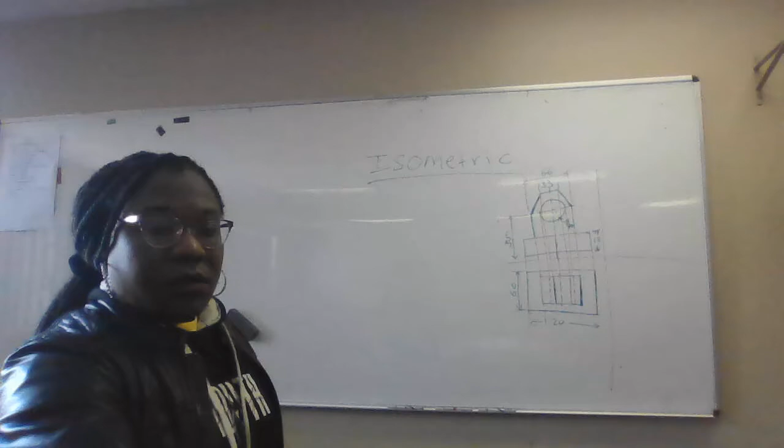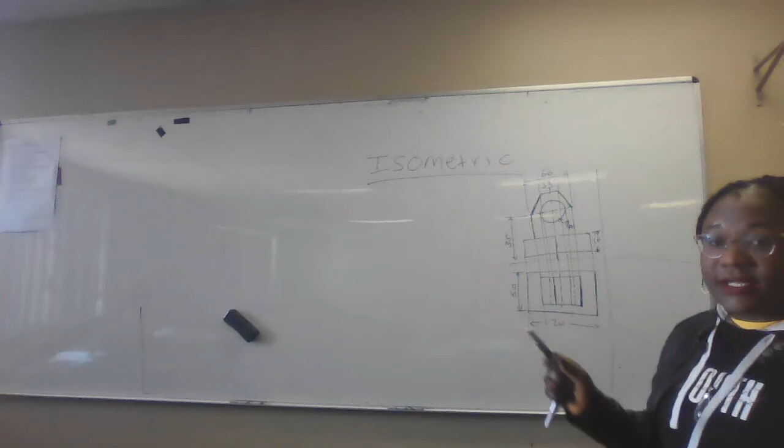Okay guys, isometric drawings. I'm going to introduce this briefly and we'll continue next week on how to draw isometric drawings. We work with three-dimensional objects, and the examiner gives you 2D drawings, from which you create a 3D model, which we call an isometric drawing. So how are you going to approach a question like this?

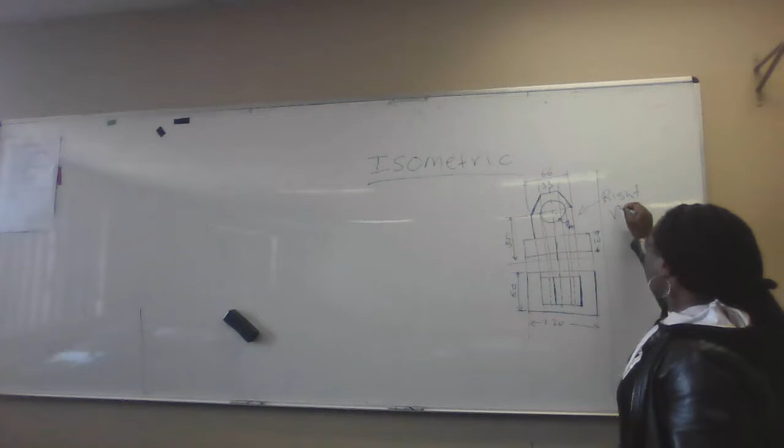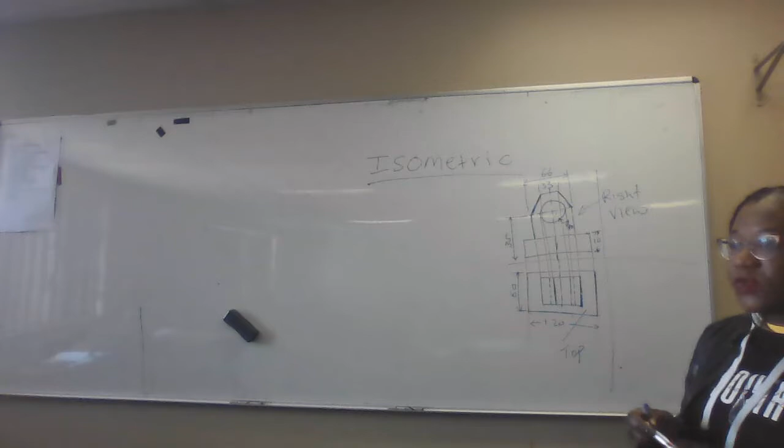If I tell you that this is in first angle projection, you know that this is a right view, and this is a top view. From this, you must be able to create a three-dimensional image. What you do first is look at the total length of this drawing, the total width, and the total height.

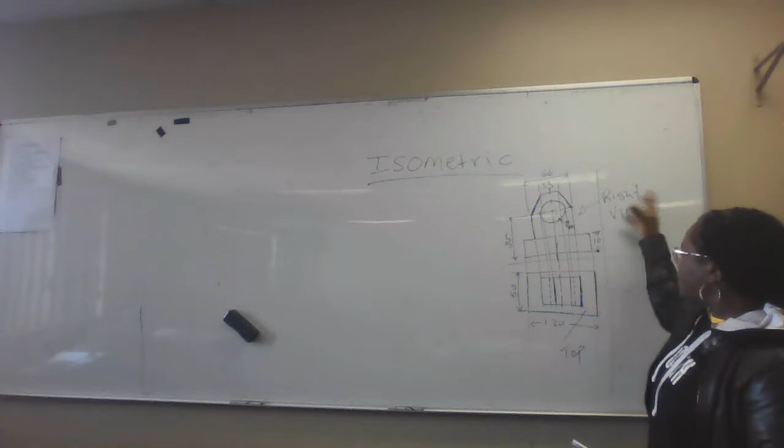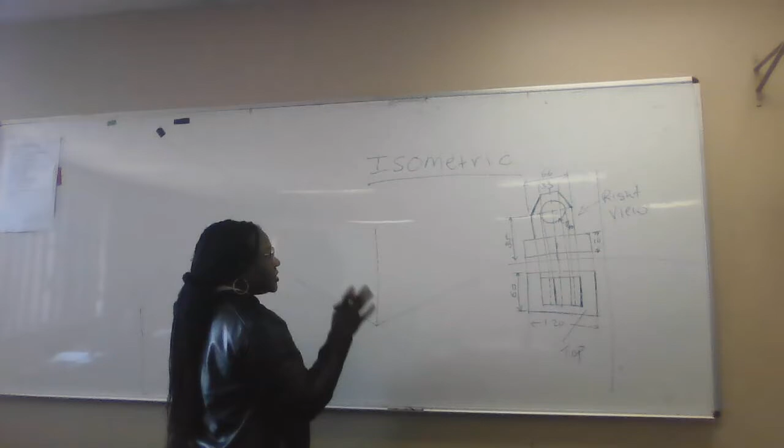So the length is 120, which is also the distance from here to here on the front, your right view. The first thing you must do is create a box. I'll come to the box, but for this type of isometric drawing, we first create an isometric scale.

How do we do an isometric scale? First draw a 45 degree line. This is 45 degrees. Then another line at 30 degrees. This is at 30 degrees, and this one is at 45 degrees.

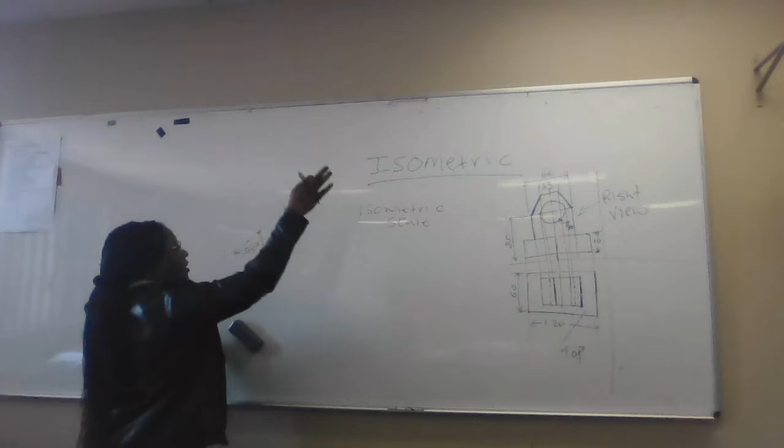We work with an isometric scale. On the 45 degree line, you're going to mark your divisions, 10, 20, 30, 40, 50, 60, all the way. The total length, the maximum length, is 120, so you're going to go all the way up to 120.

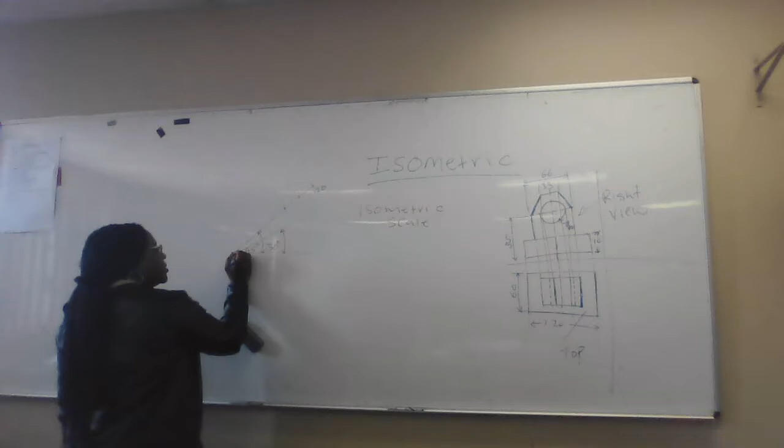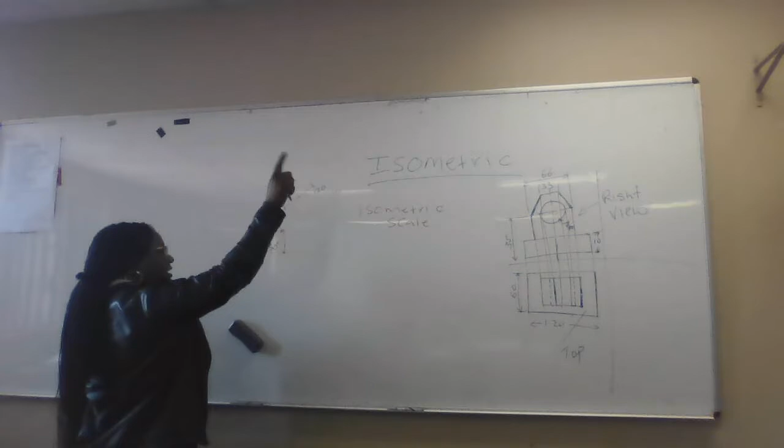The first division here must have 10 subdivisions: 1, 2, 3, 4, 5, 6, 7, 8, 9, 10 millimeters. So this is 10 millimeters. Then 20, 30, 40, 50, 60, 70, 80, 90, 100, 110, 120. You're going to have a length of 120.

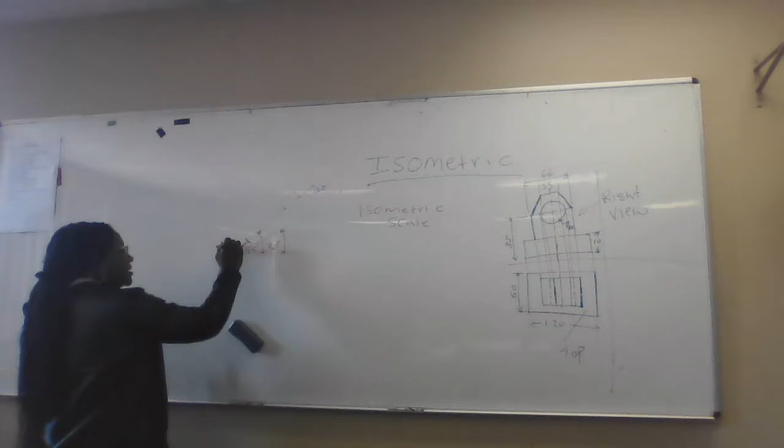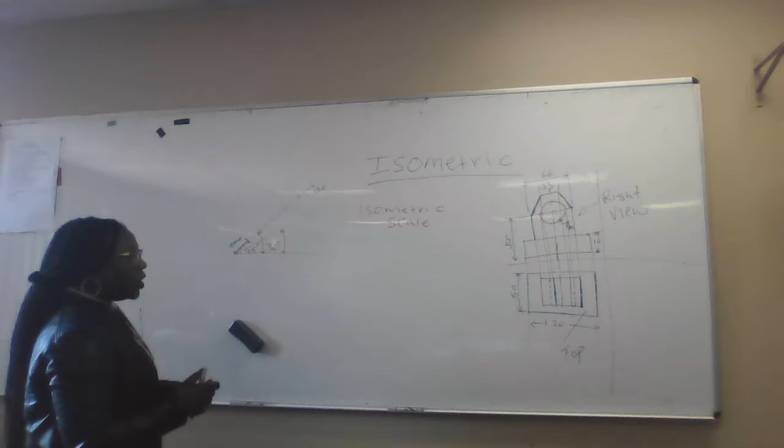The first subdivision is 10 millimeters, but with small millimeters, 1 millimeter each. Why do we do that? Because every block, even the box I'm going to create, which I call the isometric block, is going to be within 120 length, 60 width, and a total height, which is going to be 35 plus the distance going up.

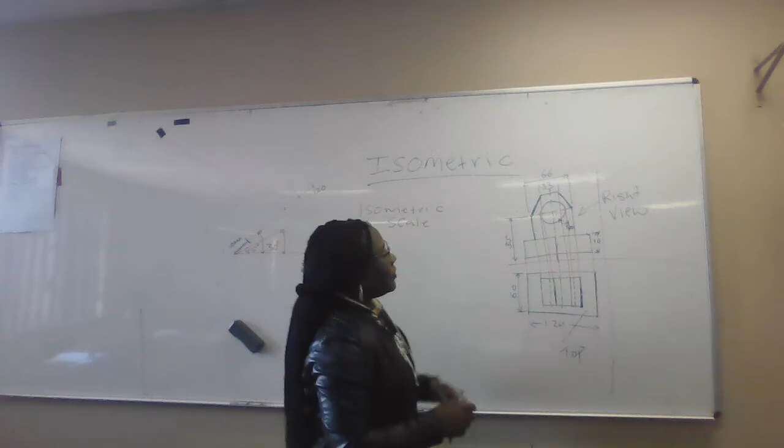In the question, that distance was given, and because it's a hexagon, we say the distance from here to here is the diameter, which is 66. So the size of 33 is the side length, so even here you are going to get the 33. That distance you add together, it's a radius, and the side length of the hexagon is the radius of the circle it is in.

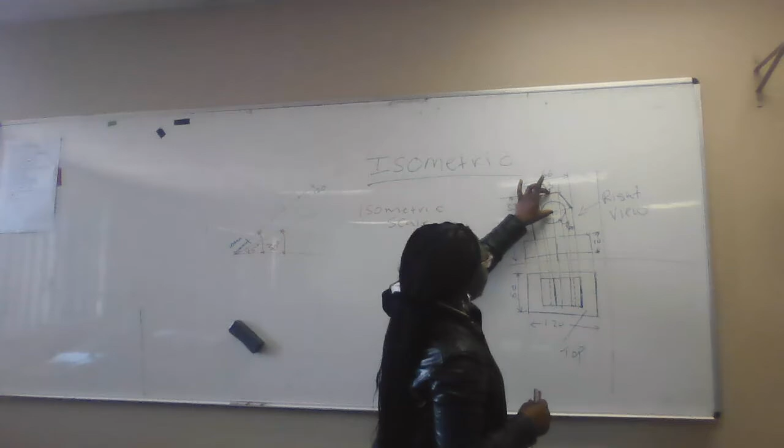So this is 33 plus 35. Then to create an isometric box, we do this first: at 30 degrees, using a 30 degree set square. All your horizontal lines will be slanting at 30 degrees, all lines going here or there at 30 degrees, while the vertical lines remain at 90 degrees.

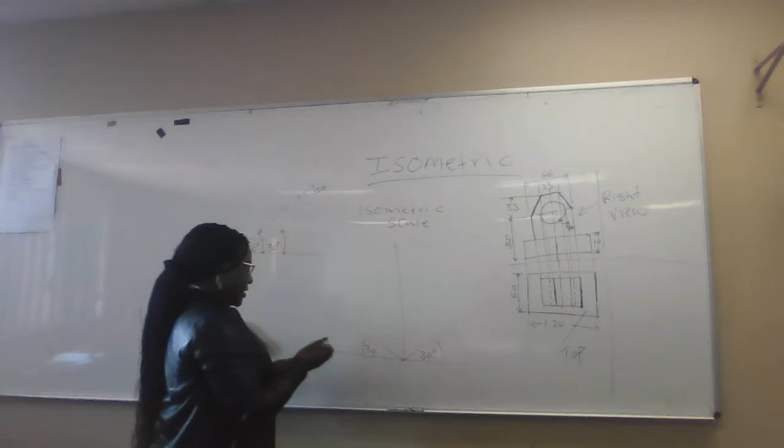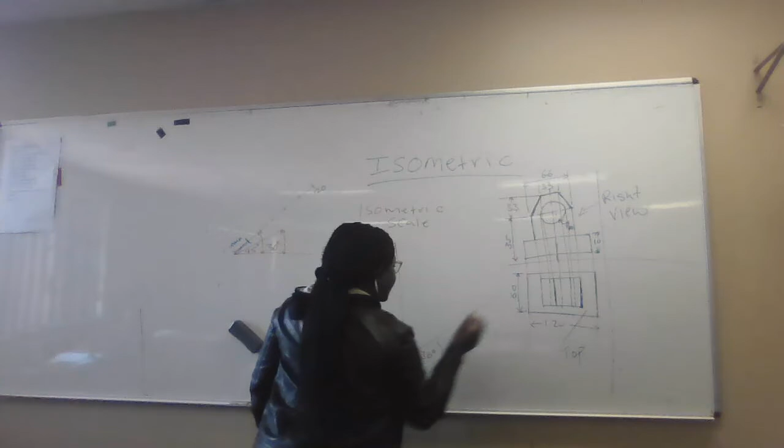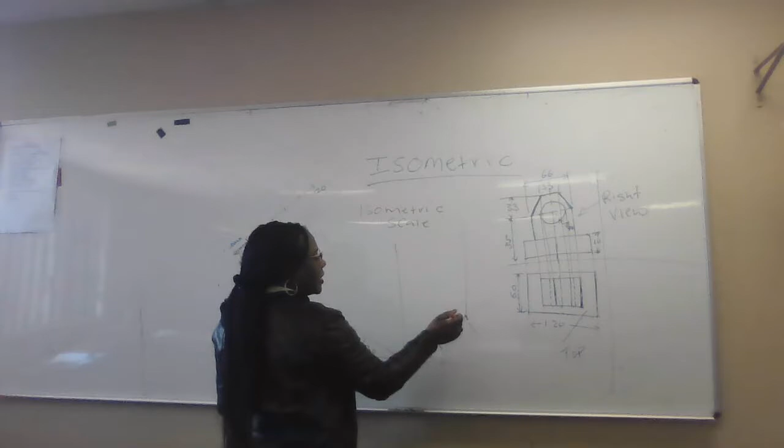Because it's in first angle projection, and this is a right view, a view from that side, this 120 length, the same 120 there, must be marked from here to there. Make sure that is 120 from here to here. When you get there, you go up by the height, which is 35 plus 33, that is 68. You measure up to 68, the total height of the object.

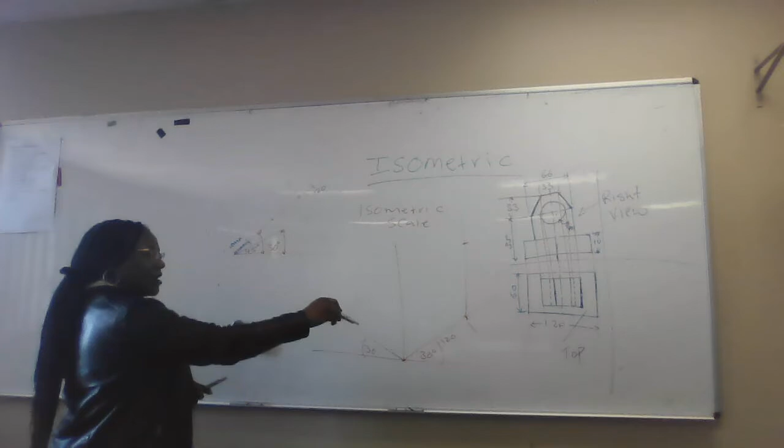When you are there, make sure that this 120 you mark here must be taken from the isometric scale. How do we take that? Because we are not going to draw one-to-one here, they say by use of an isometric scale.

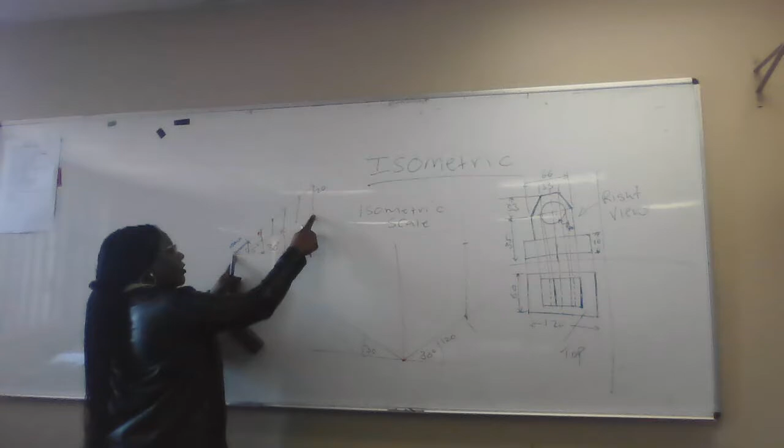So once you create those divisions, you bring them vertically down to the 30 degree line, meaning the 10 straight down, this one down, this one down, vertically down. If I'm looking for 120, I will measure from here on the 30 degree line, and that is the 120 there, not on the 45 degrees. Then the small divisions, also bring them down to 30 degrees, like that.

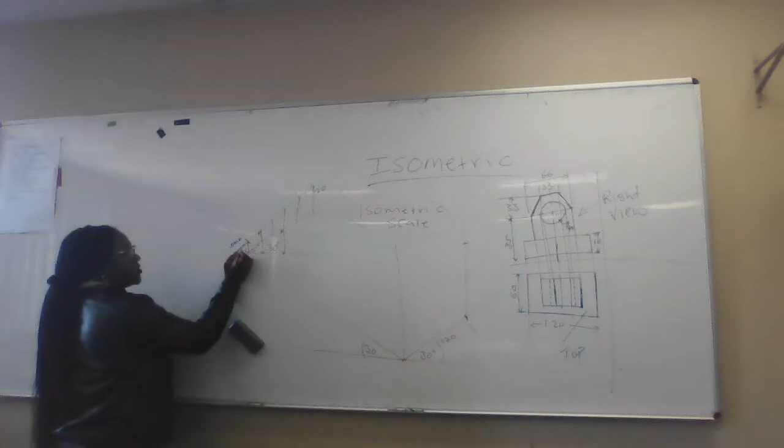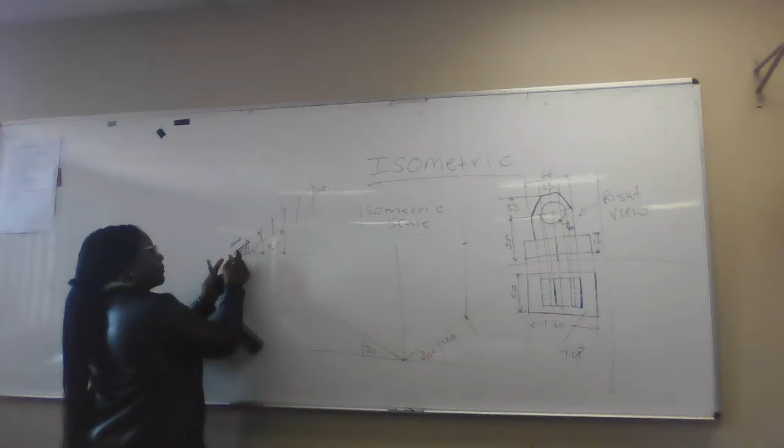If I'm looking for maybe 58, I'm going to count 10, 20, 30, 40, 50, then get the 8 from the small divisions, then I get 58, and mark it there. So the 120 that I've marked from here to here, it is from there to there, if we mark 10, 10, 10, 10 up to 120.

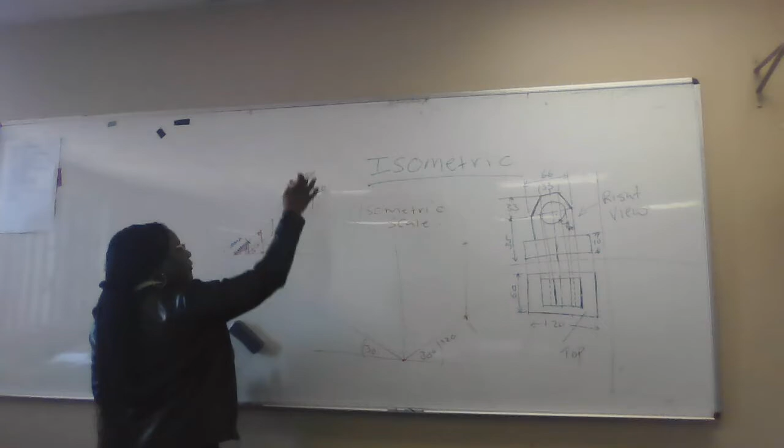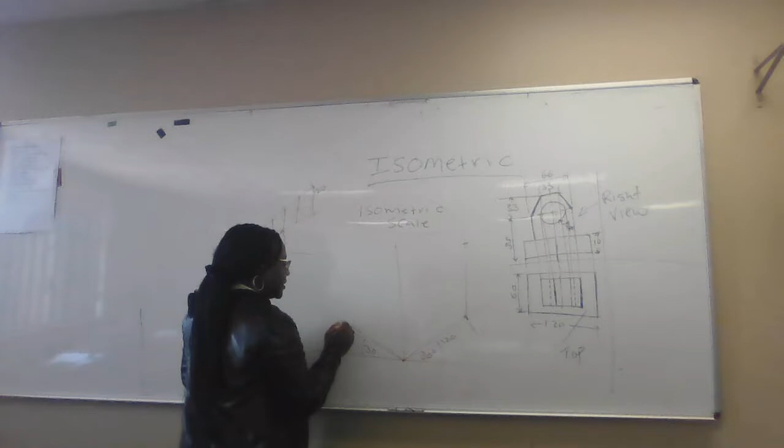Then the width will be the left view, which is this side. It's a top view, the left will be there, so the width is 60. You mark 60 degrees, 60 millimeters, so this is 60. Also, you go up.

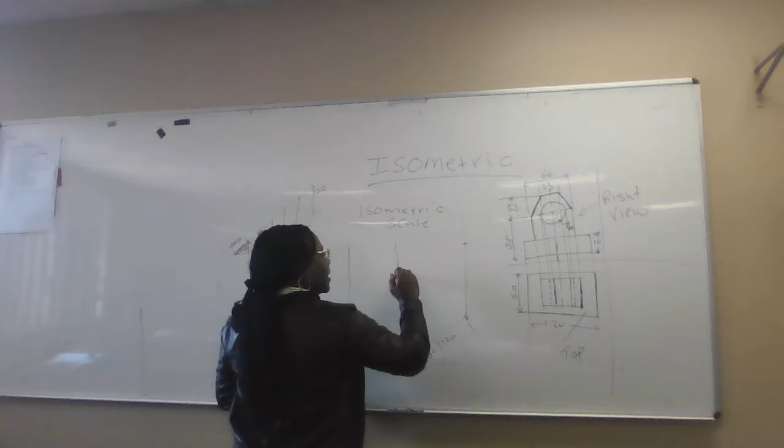Then when you go up, you are going to mark the total length of 68. Then from there to there, obviously it's going to go that way, so let's say 68 is ending here. This is 68, this is 68, this is going to be 68, from here at 30 degrees going that side.

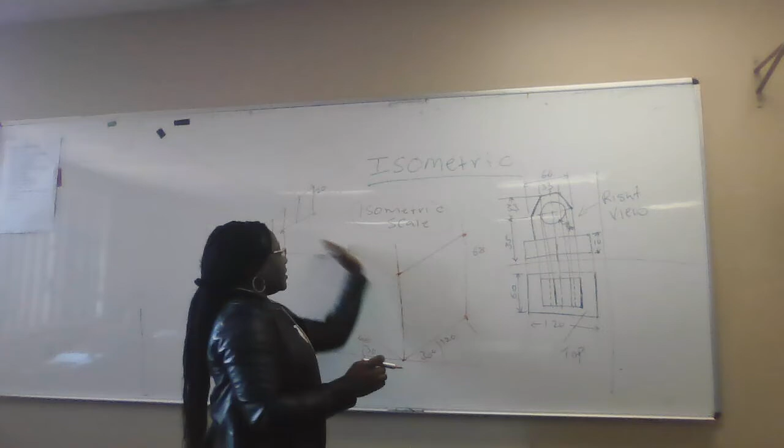You are here. This is also 60. And then the next point is from here, 60 degrees, 30 degrees going to the right. And then from there, 30 degrees going that side. That is the box that I said you are going to create.

So from here to here is 60, because that is 60 millimeters we got. Even from there to there is 60. Then from here, you can go inside with a dashed line, because it's inside the box, at 30 degrees.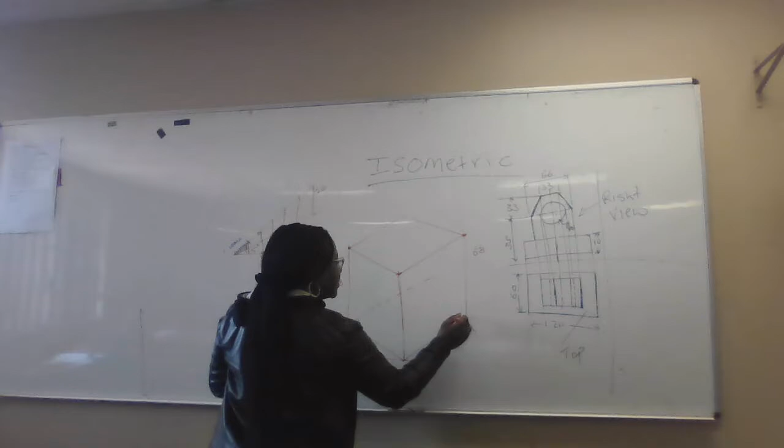And from there, 30 degrees, you go inside. From there, 30 degrees, 90 degrees down. So I'm going to create this from inside.

That is the box. So meaning that you have to create that shape within this box, not less than this or more than that. We went with the maximum distances given, and now we need to create the front view, because it's an important view, which is your right view from here.

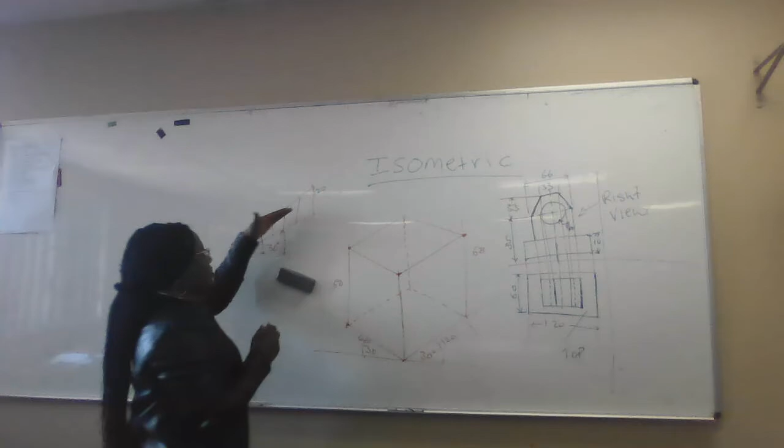Start creating the box first. How much is this? 10 by 120. 120 is already there. But if you are looking for the vertical distances, don't use the isometric scale. Just measure on your ruler on 1 to 1.

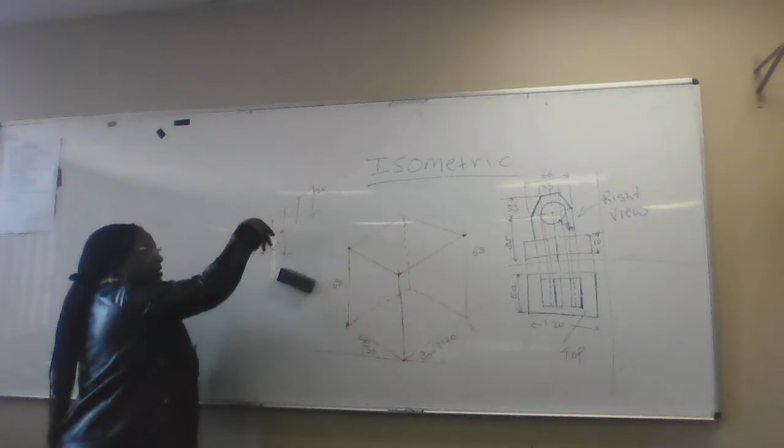But only for the horizontal lines going that way, you use the isometric scale, and on the 30 degrees line. That's why I brought them vertically down, 90 degrees down. Okay, so I'm looking for 10. I'll come mark 10 here.

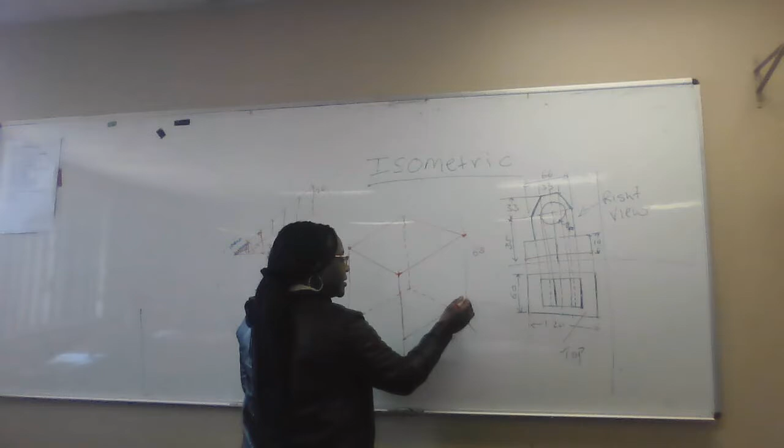Once I mark 10, I'm going to use blue, like that. Already once I draw 30 degrees, I know that that is 10. So the shape that you have just formed, make sure you make it light, because it's not the final drawing.

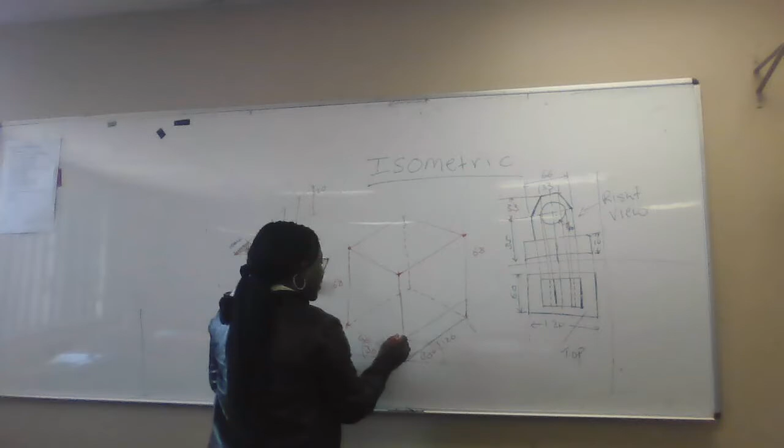That's the face. On here, from each and every point, you're going to go that side. Why? Because that is the width. It's a solid line. Then you take it that side, then you close it here.

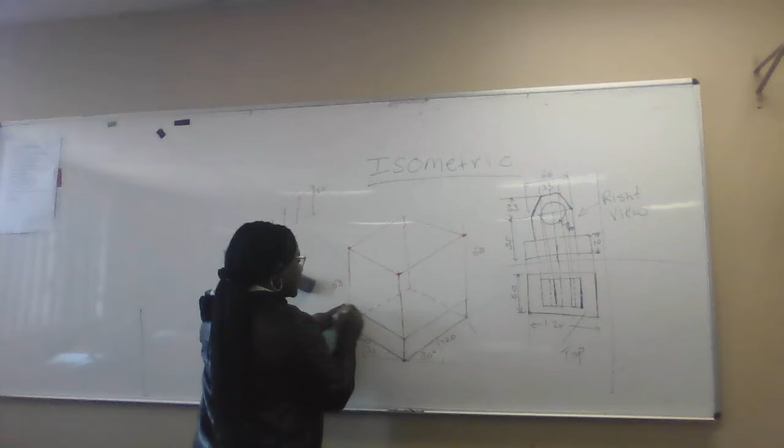This is also 10. So that is the block on the other side. Okay? Then at that point, because here you are going that side, even here you have to go that side at 30 degrees. Then from there you have to go 30 degrees to that side.

And where the two meet, that will be the point, and that is this one in hidden line that I put there. But we don't show in hidden lines. So where they meet, you make a base.

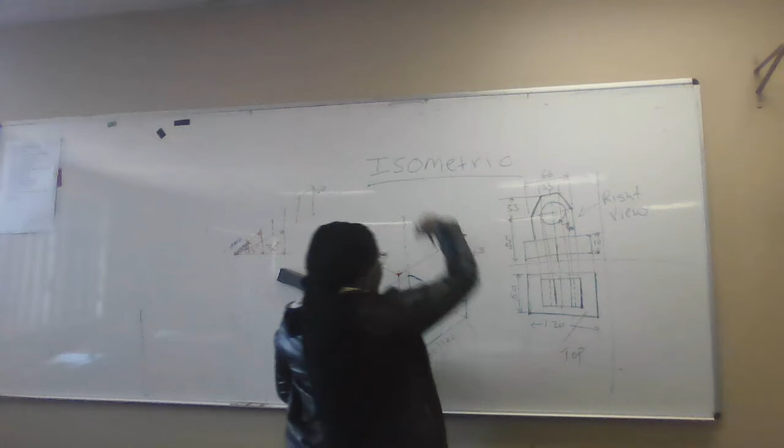And already the base that I've created is this base you can see from the top view. When you stand on top, you will see that base. So it will be solid, you outline.

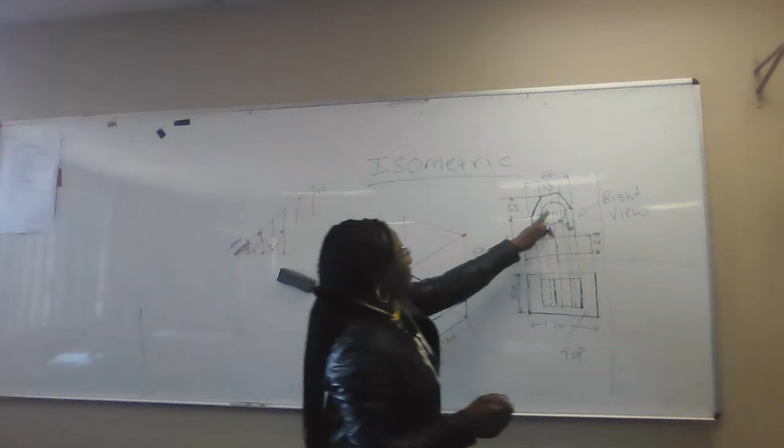Okay. After that, you are going to look at another shape. On top of this, there is this piece here. But from the front view, it's 66. So you need halfway of the front view.

Let's say in the center here, half of 120 and half of 120. You do a center line at 30 degrees. Okay? Then you measure half of 66, half of 66.

I want to mark these 2 points. So half of 66, let's say it's here, and another one here. Then at that point, I'm going to draw 30 degrees line going that way. Even there, 30 degrees line going that way. In construction line, all the red lines are going to be in construction lines.

And then it's got a height of how much. You can see that it's got a height going up. You can go up until here. Let's make up until there.

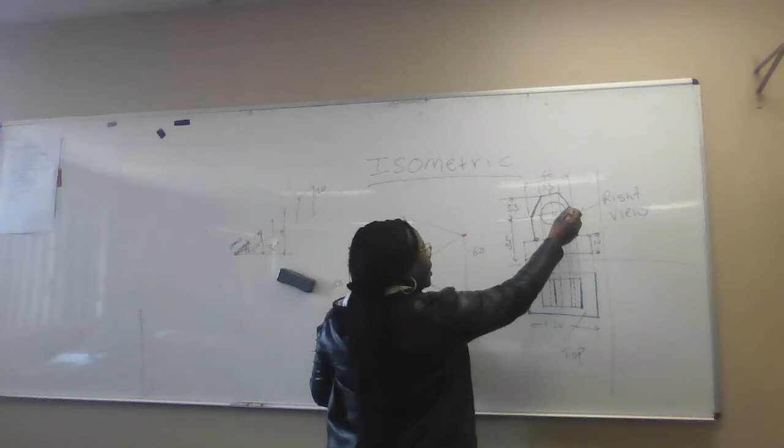So from each and every point, you need to go up. Okay? Then from there, you go up. From there, you go up. And from that corner, where the two are meeting.

But you need to know the width. It's not starting on the ends. Let me not start on the ends.

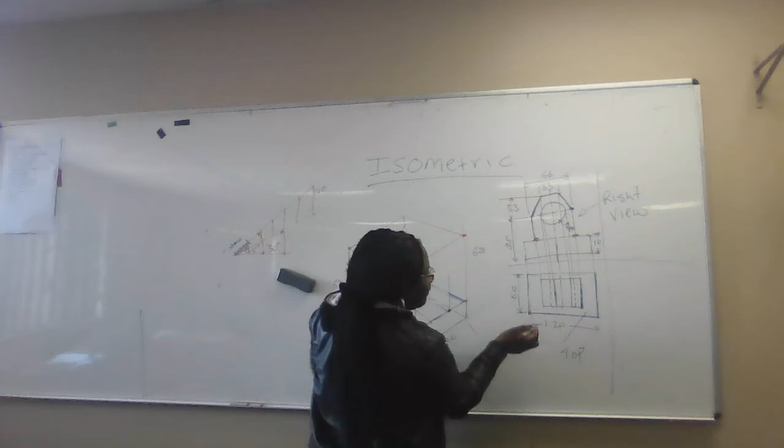When we look from the width, this piece here, it is this side, 50. They gave 50 millimeters, I didn't write, it's 50.

So if it's 50, you're going inside by 5 and inside by 5, because this is 60. Then if you go 5 plus 5 is 10. 60 minus the 10, then you go inside like that, construction line.

And where they are meeting, you can see the first line that we did, where it was meeting, which is this one here. When you go with it at 30 degrees, where it meets that one is here, and where it meets that one is there. And then this one going at 30, it's meeting here, and it's meeting the other one there.

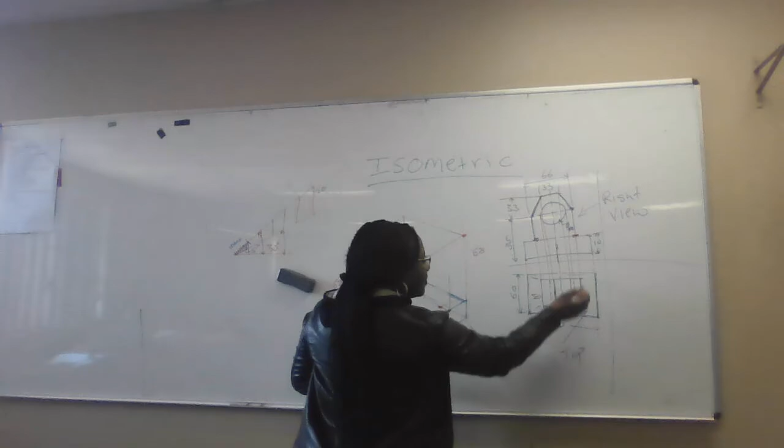I've just created the base of that shape, which is this shape here. Okay, now you can go up. By how much? We can say 35 minus 10, that is the height. You go 25 up, not this center, this is the box, you leave it there. You go 25 up, and then you come here, 25 up. Then this one you have to close, okay?

Let's reduce it a little bit. So let's say this is my 25. Then here, that is my 25. Then there I'll go inside, and this one 30 degrees until it meets with the other one there. I think you can see the box that I've created.

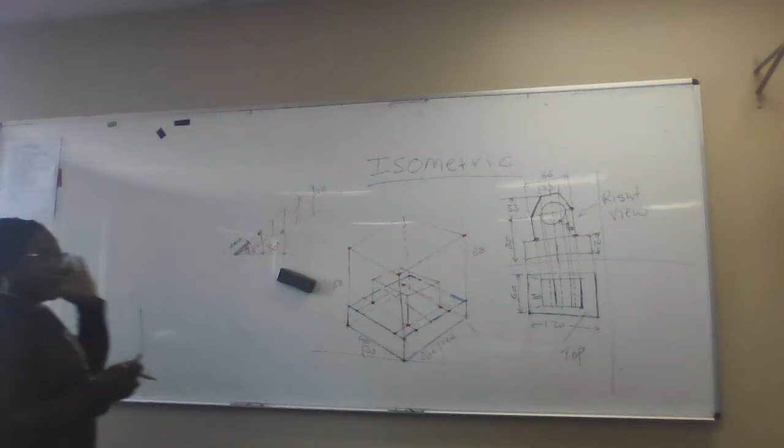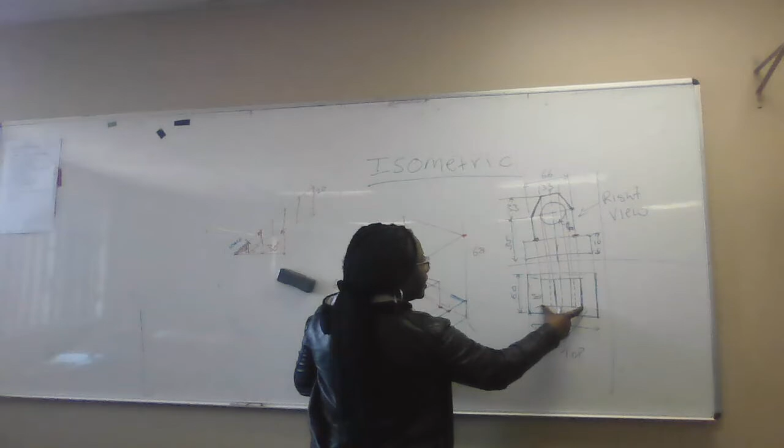So from the side view, which is this side, on the width, you see 50. There is the 50 here. From the front, we see this one, which is this distance here, which is 66. And the height, I measured from there to there.

Now I'm on the top. Then what is happening on the top, you have to create the hexagon shape. And that hexagon shape is starting on that face. So if you know how to do the hexagon, come with the center line from there, all the way to the half, I think it's the half of the box. It's only that this one is not going half.

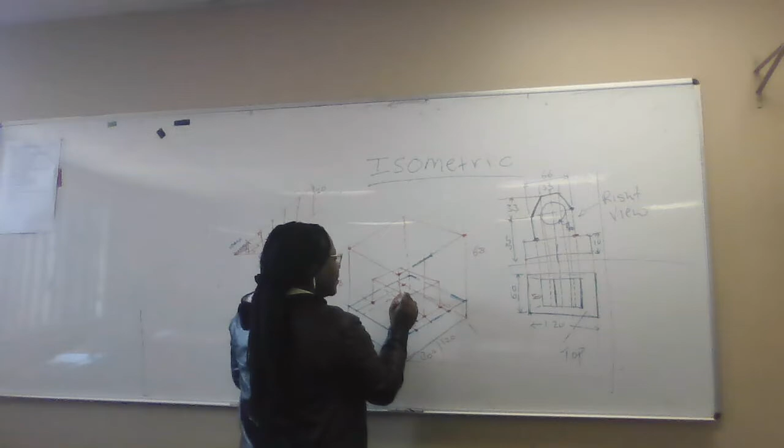Something like that, okay? Then from that shape, because that is the maximum height, you measure half of 33, and half of 33. So let's say 33 is here, and half of 33 somewhere here. This space that I'm highlighting here, it's on the face here, and it's the one that is coming to connect here. You can see that one is connecting there.

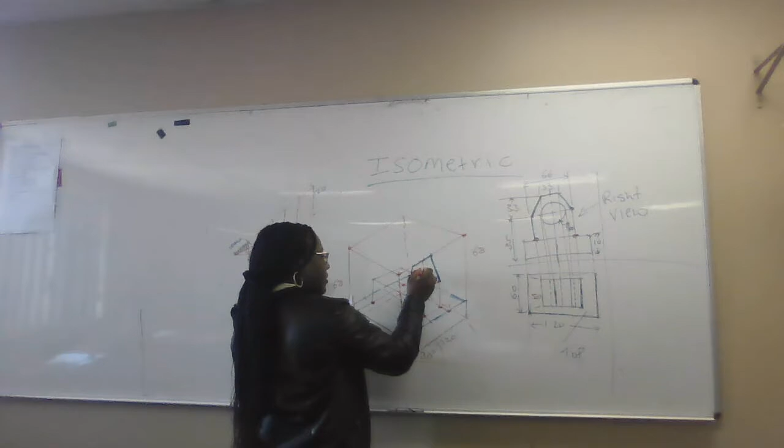So you just connect this one here, and you connect the other one on this end. So this is our center line. Then once you do that, you are going to take your lines to, which is also happening at the back. If you take this line 30 degrees to the back, 30 degrees to the back, it's going to be like that.

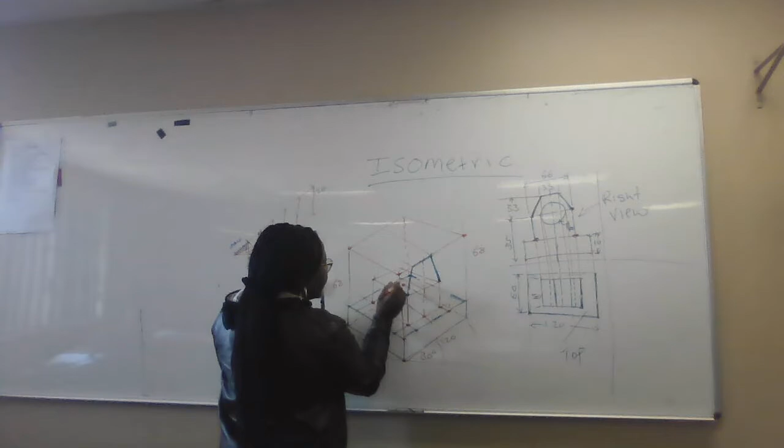Then you need to make sure that at that point here, you are going to go straight the way we came here to join with those two pieces. I'm going to go with a straight line in the midpoint here. I'll go with a 30 degrees line to the half of the box at the back, like the way it was here, okay? Then I can take this center line that way, okay?

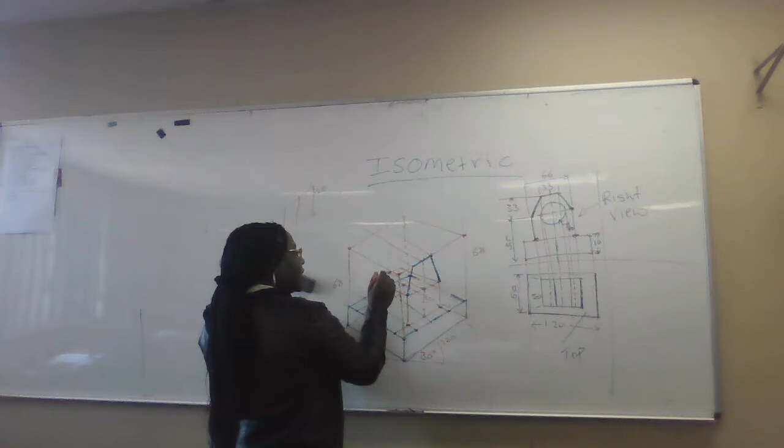Then from there, I can go up this point here, or else you need to make sure that you don't exceed that box from the top. So how am I going to get that point? I need to just go up here by the length, which is 50. So from here, you measure 50 going inside. Maybe the 50 ends here. That way you can go 50, maybe it ends there. And once it ends there, it's supposed to come and connect here.

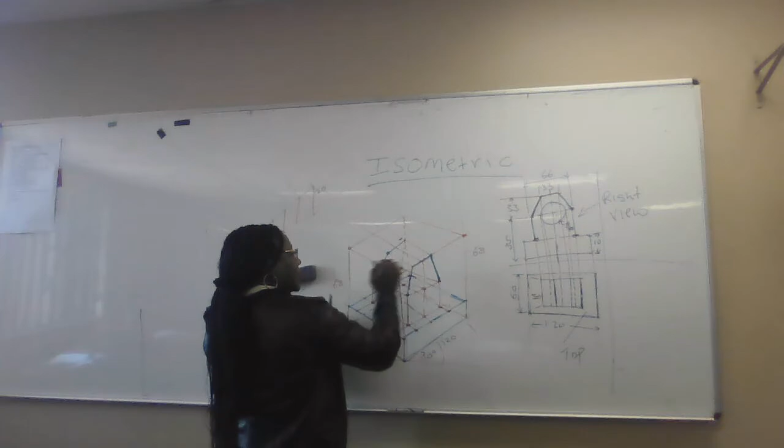And from there, 30 degrees, the way we went here, it's gonna go 30 degrees here. Then this one is going to join there, but it's at the back. You are not going to see how this one joins at the back there. But this should be solid. This should be solid. And this should be solid.

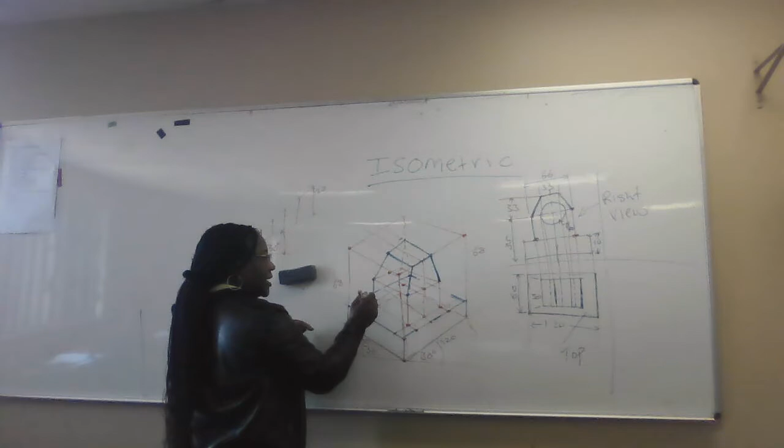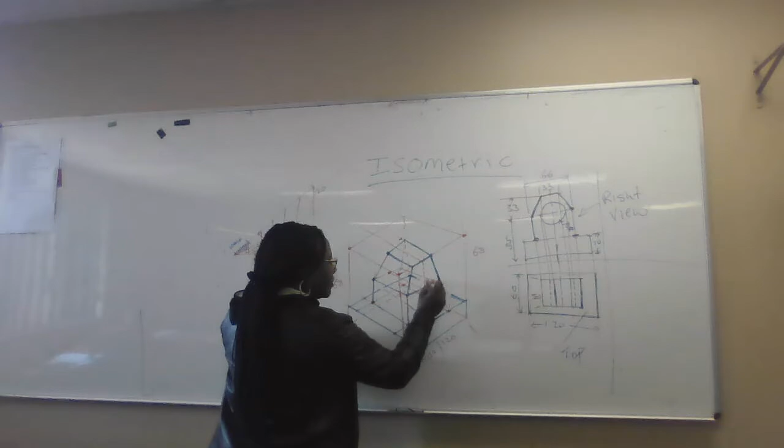And then you start outlining those edges. You can see. This one, it's a box. At the bottom, you outline, you outline. Why am I outlining? Oh, there's no outline here. So we don't need to put an outline here. Okay? It's just one thing. It's going to be one shape.

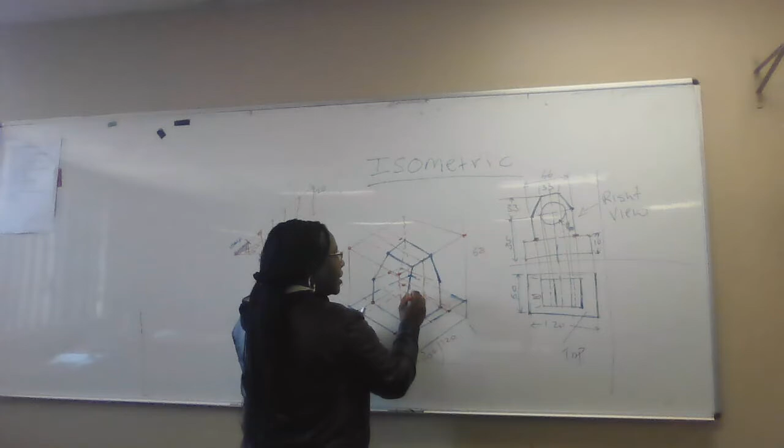I see there is a circle here. When we come to the circle, I'm going to explain how we do the isometric circle. And the circle is just lying in here, on the center. Yeah, there is a circle there. If they say there is a circle, you are supposed to work with what we call isometric circles.

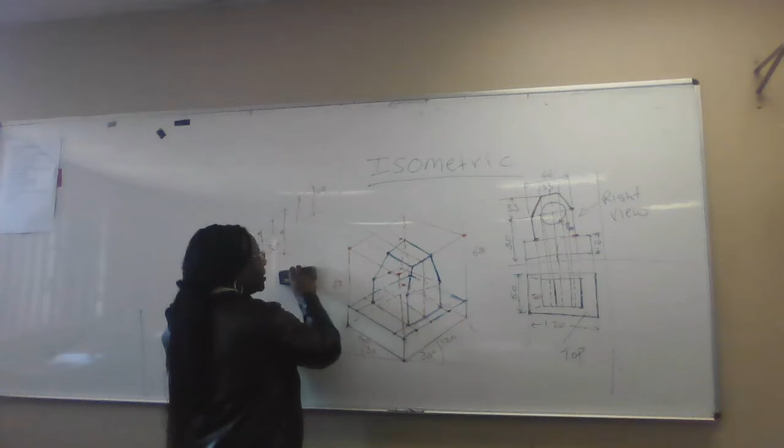And if that circle is viewed from the right, you have to create a box like that on the right hand side. And this box must have the diameter of a circle, and the diameter of a circle, diameter of a circle. So that diameter there, they're saying 40. So 40 diameter. We are not going to work with the isometric scale because now it's going to reduce.

What happens, you have to have the same diameter. So if I work with the isometric scale on getting 40, you must also use the isometric scale to get that one. So what I'm trying to say is 40, 40, 40, 40 from the isometric scale because this thing has been reduced. And the next thing to do to draw the circle is join the long points here.

Once you join that, come to the midpoint at the bottom, halfway, and join to the opposite corner. Then come to the midpoint on top, join to the opposite corner. Now come with your compass here, open until it touches there and that corner. Open your compass and draw.

Draw this circle. Come to this center, open until it touches here and that corner. Then draw this one. Come to this center. So at center 1, center 2, center 3. From center 3, you open to touch those two and it closes. Center 4, open to come and close here.

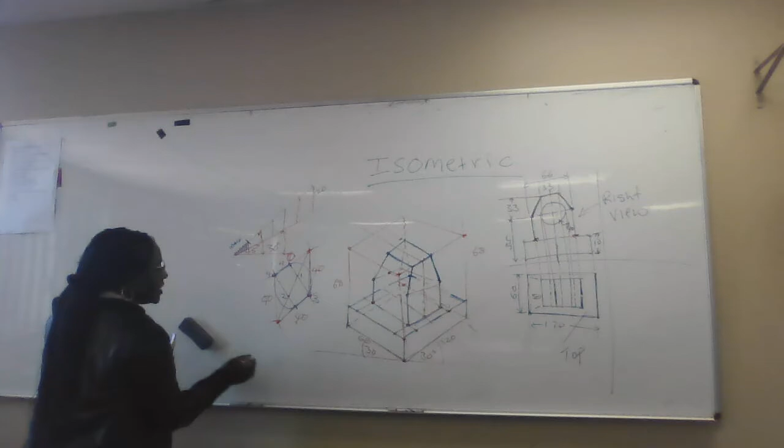If the circle is on your right hand side... if the circle was on the left hand side, I was going to do the isometric scale going to the left, 40, 40, going that way, and join that one. Then midpoint to corner, midpoint to corner, same things.

Then this will be center 1, center 2. Open from here to there, then draw. Center 2 touches this one and this corner. Center 3 to close. Center 4 to close on the other end.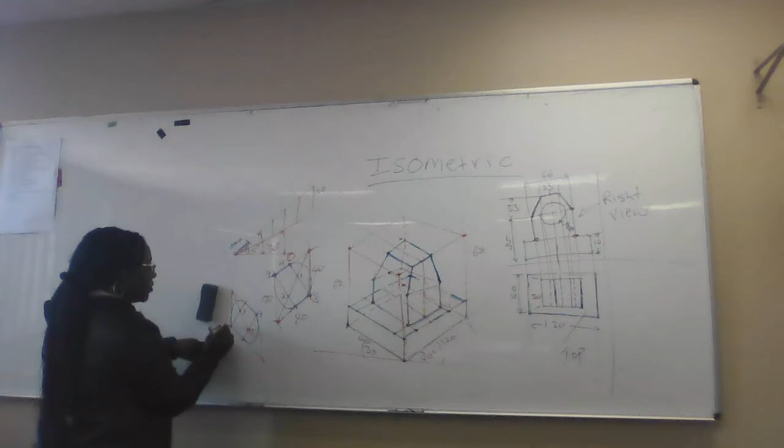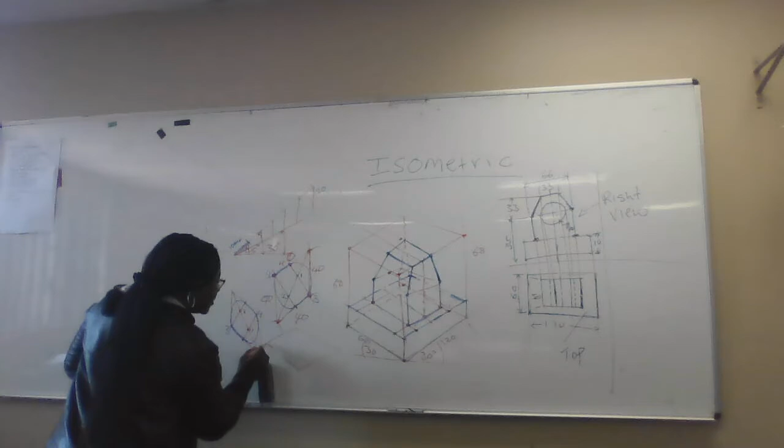And then if the circle is on the top view, how are you going to draw the circle or the square? If it's on the top view, we start with the line going at 30 degrees, going that way, 30 degrees, 30 degrees. If the circle is viewed from the top, then you join the longest point.

Then you come to midpoint to corner, midpoint here to corner here. This will be your center 1, this will be your center 2. Come to center 1, open until here and there, and draw the first arc.

In fact, you have to open until the midpoint here. That's how we open, midpoint to midpoint. Center 2, midpoint to midpoint. Center 3, midpoint to midpoint, which is the same here. When you're on center 1, it's midpoint to midpoint here, you close. When you're on center 2, midpoint here to midpoint here, you draw. Center 3, midpoint here to midpoint here, you cover. Center 4, midpoint to midpoint.

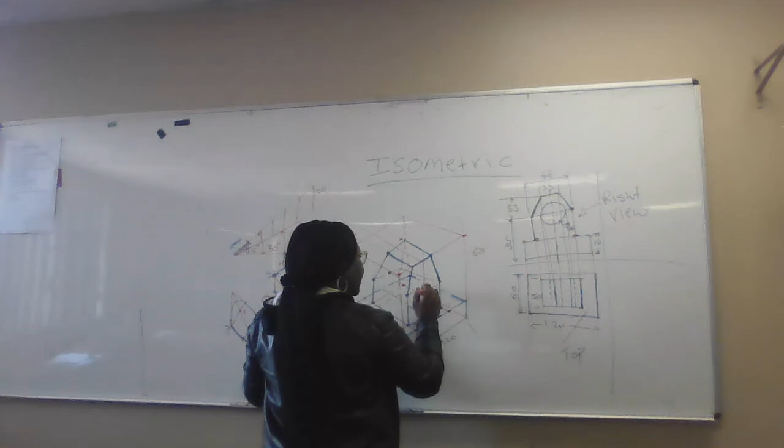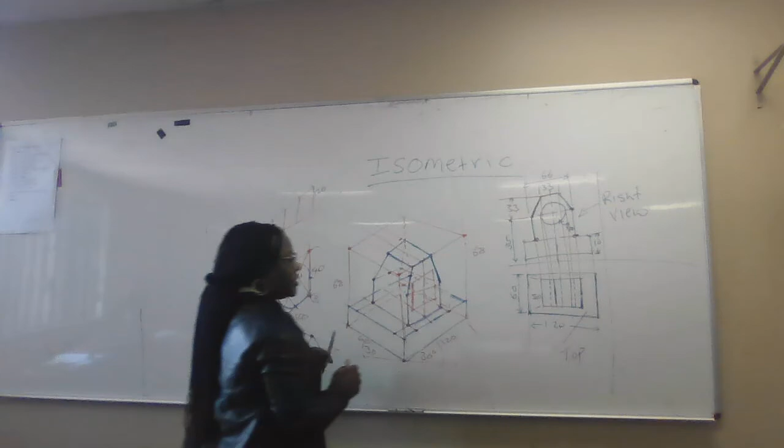That is what I'm going to do here. So it's 40, I'll measure half of 40, half of 40. Draw the line and draw that. Then half of 40 going up, I'll draw an isometric box and then the 40 here. That is the box. Join the long one with the long one.

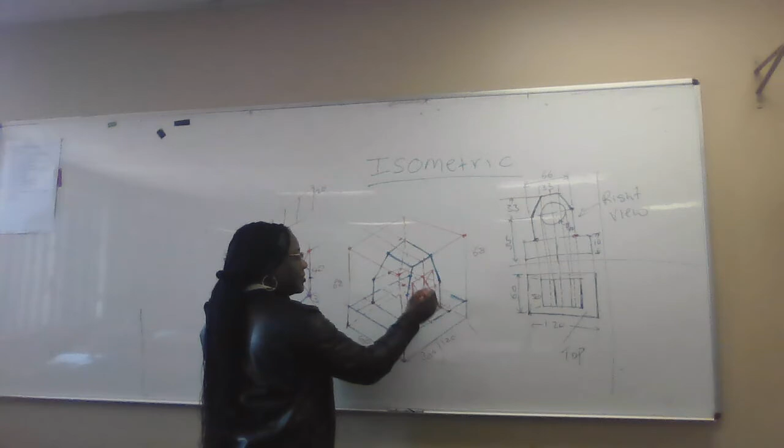Midpoint to corner there, midpoint here to corner here. The red lines must be very faint on your paper. Make sure you do construction. So there is your center 1.

Open your compass from here to touch halfway, halfway, and draw the arc. Come to center 2, open to touch halfway and halfway here, there is this arc. Come to center 3, open from here to close. Center 4, open from corner to touch that.

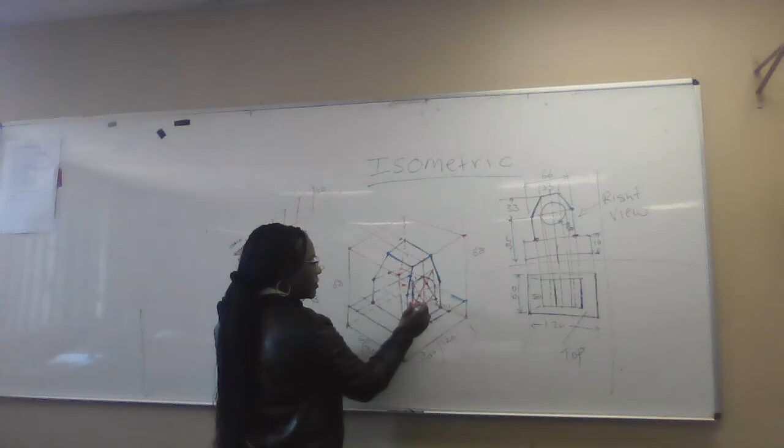This was our center 1, center 2. That is the isometric circle. You have to project this to the back as well, just in case you are going to see it.

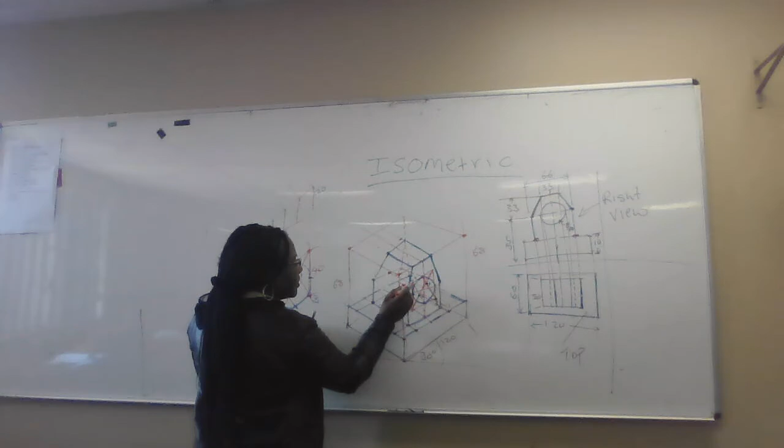You have to project 30 degrees to the back and create the isometric box at the back, the same way we did. There will be an isometric box at the back, at the face there. Then do that, but we don't need it because it's not coming here.

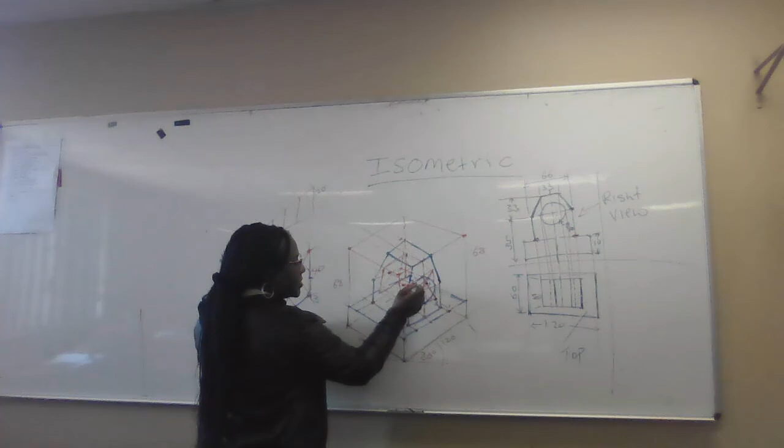The thickness is too much, but there are times when you need to show this piece here, only if the thickness is not too much, then the box is closer. So our box is far because it's going to just end here, it's inside in hidden details. So you just do like that.

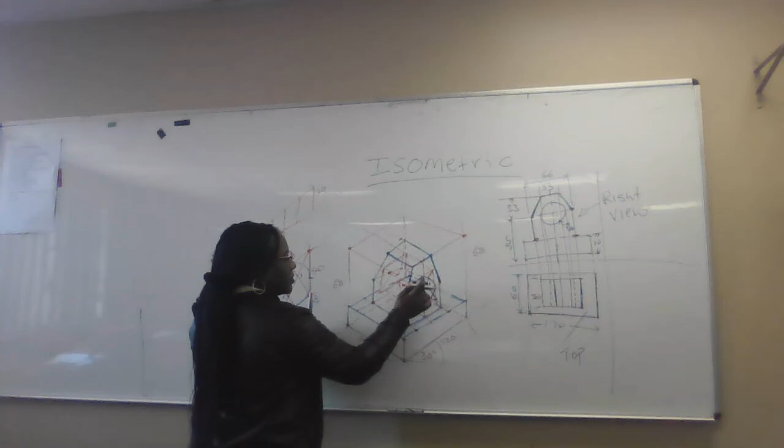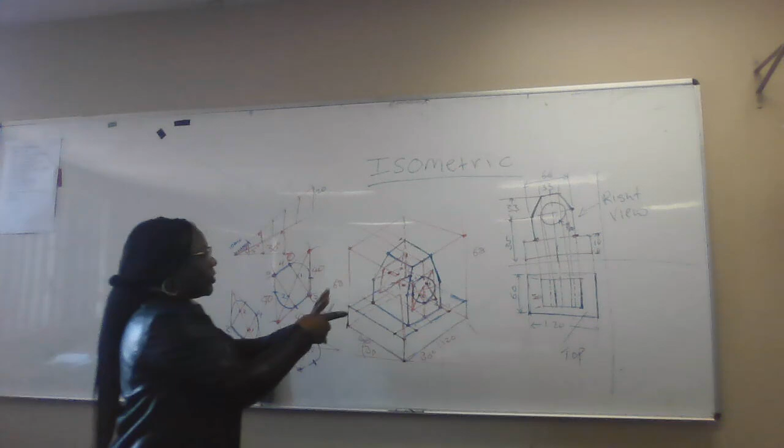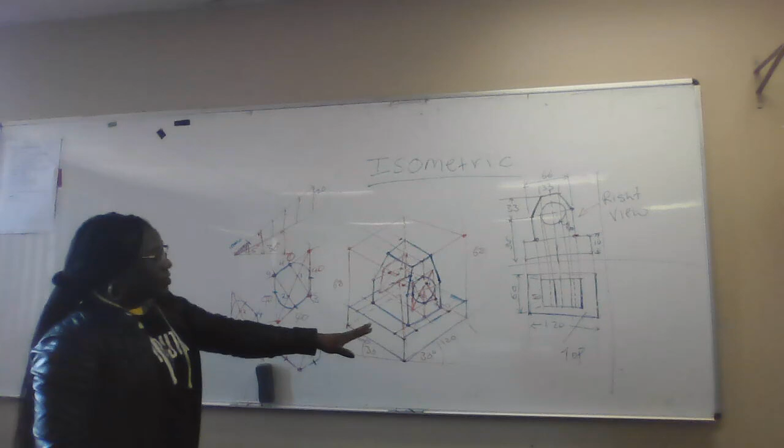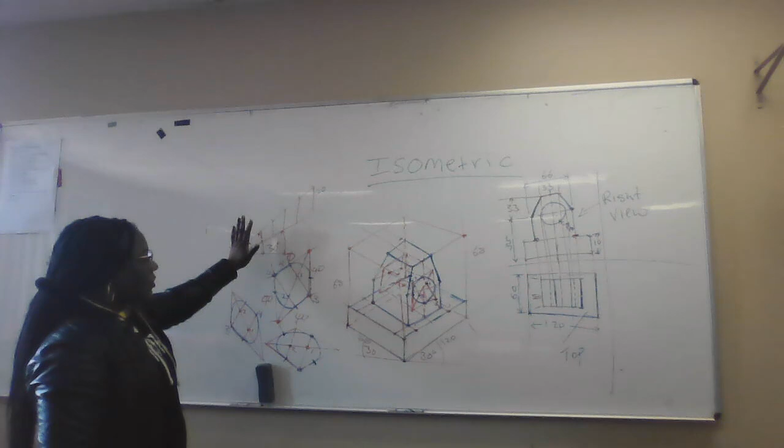And if it was a third angle projection, I was going to make the front here, starting here. The first thing is to create an isometric box from the isometric scale. Then when doing an isometric circle, use the isometric scale for vertical and horizontal lines. But any other horizontal lines, going that way or there at 30 degrees, you always use the isometric scale. All the vertical lines, you don't use isometric scale. The only vertical line you use isometric scale on is the vertical of the box which you are creating the isometric circle on. Alright, we shall see, and if there will be any problems, please just contact me.